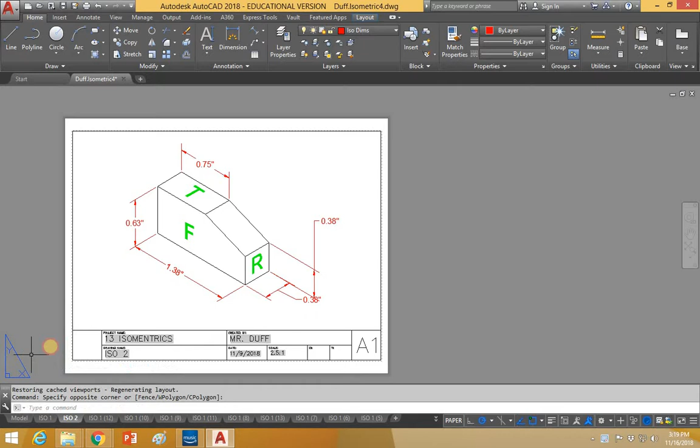In fact, as I'm sitting here, I'm just happening to be noticing this should be a little bit different, this whole situation. So quickly I'm going to go to model here, zip over to this, and this is another one of those ones where it's not updated in the video. I don't know why exactly. So we'll deal with this in a second.

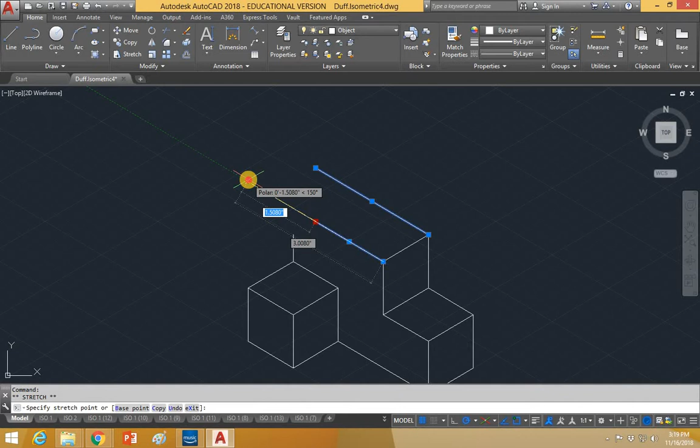So, talking about this drawing, this is our next drawing that has to get dimensions. So, let's go back and take these ellipses off of here that we put on here earlier. And then let's get some grip edit practice. So, if I take my grip edit and I pull this line out, and just to make sure that I stay with that green line in front of it, it'll draw it out to a length where I know that it'll stay straight. And then I'll draw this one out, and I'll cross over that line, just like if I was drawing with my pencil.

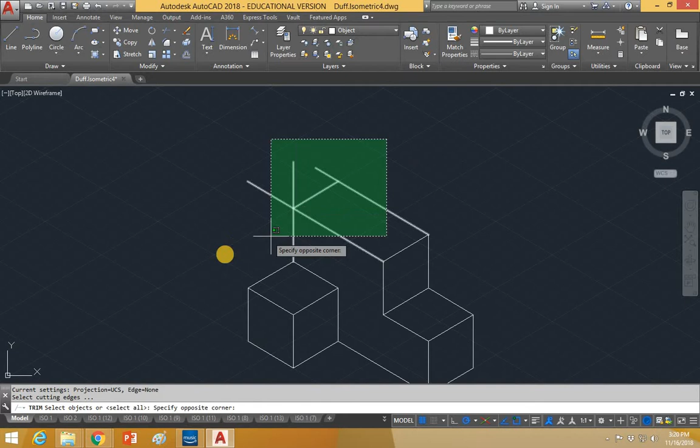Then grab line. I better change my layer. I want to get to object. Make sure I'm in object here. I am. So object, line, pull out here. Great. TR. And we'll drag all of this off of here. So we trim all that out. Okay, great. So we have our original object back. So let's go back to the dimensioning layer. Let's go to ISO dims. Let's come up here and go to aligned.

And the reason, maybe the main reason we're making this video, is when we have situations like this. So if I click on this side and I click down here, so the length of this object is, let's get a look at it, 1, 2, 3, 4, 5, 6, 7, 8, 9, 10, 11. Looks like 12 squares, right? So it should be 3 inches. And if I click on it this way, it pulls me off at 3.61, which is not what I want.

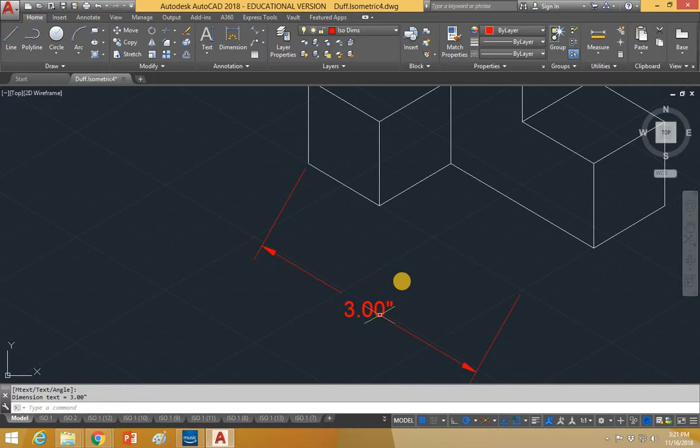The way I want to be able to pull my dimension off here is when I go to aligned, I'm going to click on this side, but because this line doesn't extend out, I need to pull it from here out in this area. Okay, so what I'm going to do is I'm going to hold my mouse here and I'm going to draw this green tracking line out to this intersection and then click and pull off, and then I'll do my dim edit now so we can see what we're looking at.

Click oblique. Click our object, enter. We got to put our angle in here. I think it's this way. Yep, we're good. So that's awesome. Now we have our 3 coming off the right way. The problem that we have, though, is that this extension line needs to extend down to here to be done properly. And we don't have that situation. And there's really no way to edit this, so we're going to come up with a cheat.

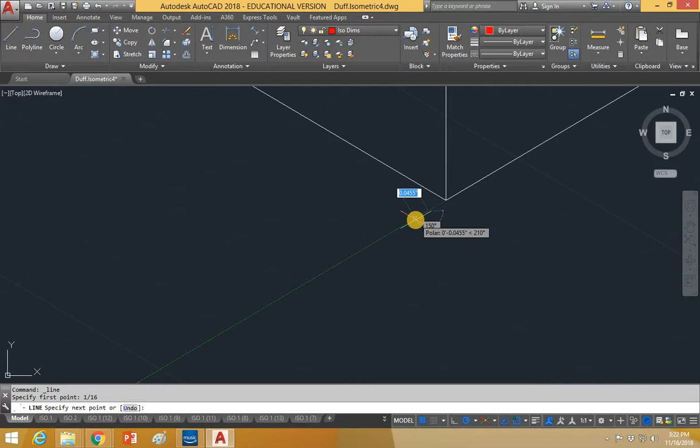So I'm going to come up with the line tool and make sure I'm still in ISO dims, and I'm going to come down here and I'm going to draw my mouse off because I want to start this point a certain distance away. Now most of our extension lines, I don't remember exactly how we set it up in our dim styles, but we're going to make 1/16 how far away we should start our extension line from the start of our line. So I'm going to come in here and I'm going to draw this, and now nobody's the wiser. It looks like we have our general dimension the way it's supposed to be.

So I'm going to go through and just dimension this whole thing together here to see if we run up with any other problems. One of the more difficult parts, and you're going to end up stealing a lot of the dimensions from me, but you should learn as you go. And the idea is you want to put as few dimensions on as humanly possible while still making the person who tries to build it able to build it.

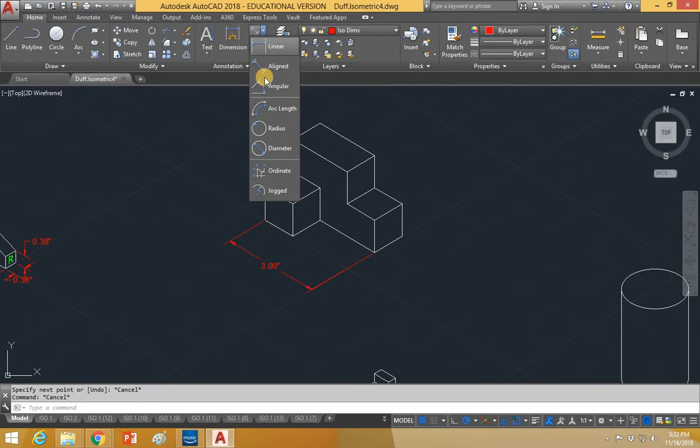So you really want to be careful not to over dimension, especially because the more dimensions you put on, the more complicated the drawing becomes. Visually, the person who's trying to make it is confused by the fact that you have so many dimensions on there. And some things can be inferred.

So like, for example, if we put this 1 on here, and let's put this someplace else. Let's go like this. Let's go aligned, and we'll pull a line. Let's go this way. Let's go up top. So we'll click here, and then we'll extend this line up to where it hits there. We get 2, and so we can see it right.

Dim edit, oblique, click my object. I believe we want to go down with this one. Yeah, I think that's pretty good. We'll align the text later. But now we have that same problem we had before. So let's grab the line tool. I'm going to come up. I'll zoom in closer so I can see what I'm doing.

1/16. Enter, connect our lines. Again, no one's the wiser and everything looks perfect. So then we want to go through, and at some point here we have to say that this is 1. And once we put this 1 on here, so let's do this.

Let's go here, here, to there, drag off a little bit, dim edit, oblique, click our object, enter. I'll go away from it again. Okay, pop that in. And now we don't need to dimension from here to here.

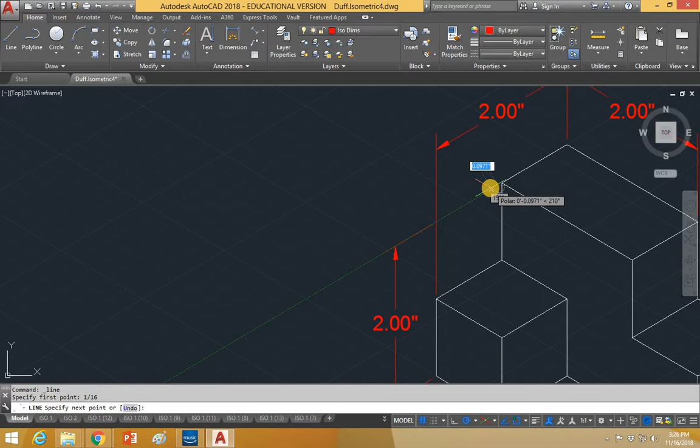And again, we're gonna have that situation where we need a line in here. So come off. Let's go 1/16. Connect to our arrow. No one's the wiser. We're in good shape there. So do we have everything we need on this object? We have this. We have this overall of 3. We know that's 1. We have this overall of 2. I don't think we have anything that shows that this or this also is 1.

So let's go through and put something in there. And, you know, sometimes you have to wrestle between what's the clearest way to do it and what's the... Because if I put this 1 down here, and I'll show you what I mean, it's going to make the object look clunky. It's easy to do, and we don't have to use the cheat that we've been using. But if we go dim edit, oblique, click here, enter, there to there.

Now, it's not the worst, but it might look better. It might be easier to read if I do it someplace else. I just hit undo there just to get rid of that. So let's go aligned again and see how this looks. And literally, guys, this is dimensioning. Sometimes you have to kind of play with things to get the right situation.

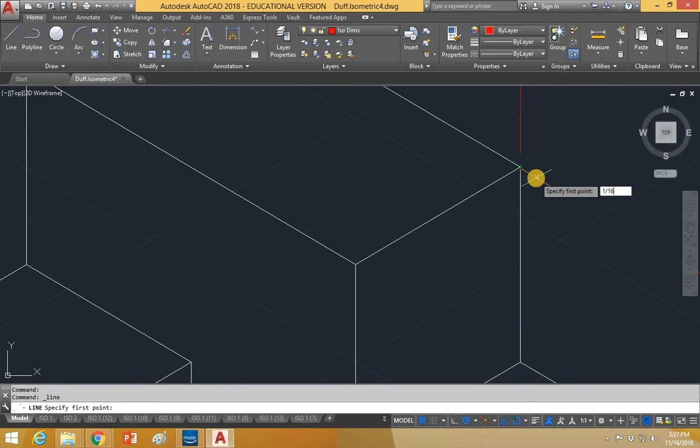So dim edit, click oblique, click here, hit enter, draw our angle back this way, add our line. Oops, almost forgot our 1/16. Enter. We'll see how this looks. Maybe we like this better. The goal is to make it as readable as possible for the user, and I like that one. Now, it could have been down here. It wouldn't have been the worst situation, but we don't have to have that situation, so let's not do it.

Another place we don't know for sure is we don't know that this is 1. There's no way we can guarantee this. So what I would suggest doing is rather than try to cram that 1 in there where we know we're going to get a leader, let's do this. Let's back up this 3. And let's move this 2 back to here. And then let's put this dimension in. Let's go aligned.

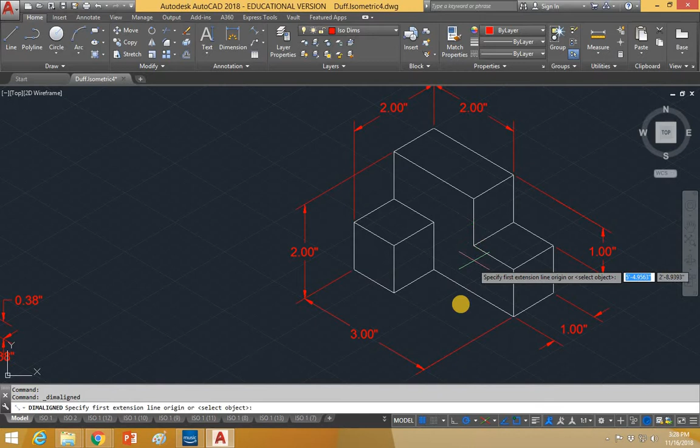And we'll go... The other thing you don't want to do, this is also wrong. You don't want to be here to here because that extension line is going to finish through the object, and you wouldn't want that. So make sure you don't do it that way. We should do it with our cheat that we've kind of been doing here to make it look correct. So draw here, and then we can pull our line out again.

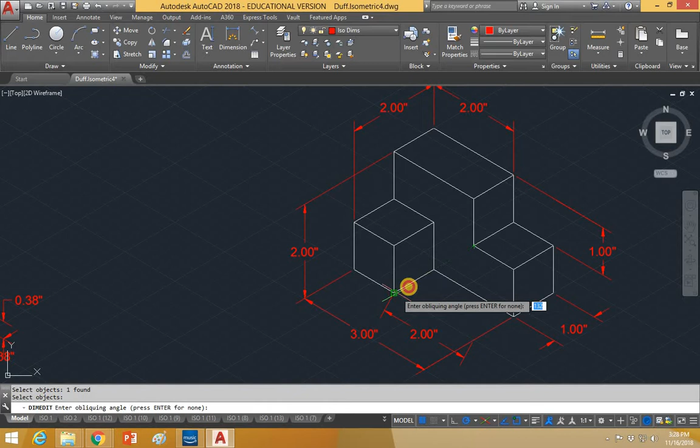Put that 2 there, dim edit, oblique, click our object, enter, here to there, and I like the way that looks. Right? So now I come up and I know this is an overall of 3, this is an overall of 2, so we know this has to be 1. Same thing here. Overall of 2 has to be 1. I think that's all the lines we're going to need here.

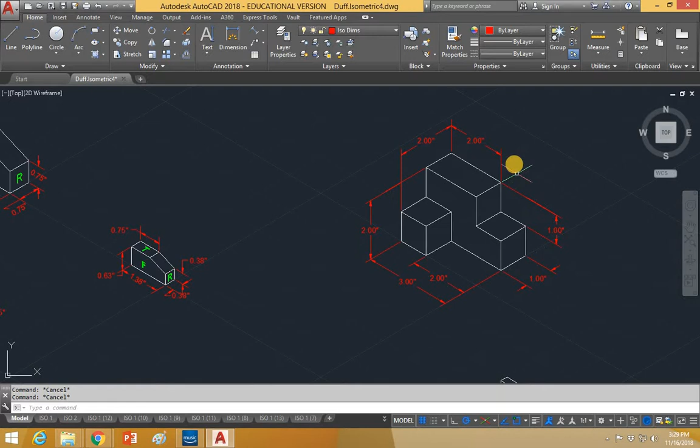We might tweak it up a little bit as we bring it into paper space, but in general, we're pretty good. We also want to make a real effort. So if you look at the way my dimensions are, we want to try to keep them off of the object, right? We don't want a situation like this. This would be wrong. We don't want here to here, right? And then dim edit, here, enter. This is like an absolute emergency if you have to do something. There's really no other way.

We want to keep our dimensions off the object. We want to also keep them as clear as possible. You can see I've got good spacing. It's not hard to tell which line is going to what space, what dimension is for what arrows. We're in good shape. Most of what we did down here, this is like, I don't know, drawing number 9, I think. But most of what we did down here had similar issues. We had to come up with our cheat here.

You can actually see we're missing our cheat here. I didn't realize it when we did it, but now I can take my line, come down here, draw it off, 1/16, draw that up to here, and now that's fixed, right? So we had a couple of things here. There was also some inferences here, right? You know, I put this 0.25 in here. I could have done, what's the overall? I could have done 0.75 from here to here like I did on the last object. But I didn't like the cheat. I didn't like the way it was going to look with having to pull that one line off of there.

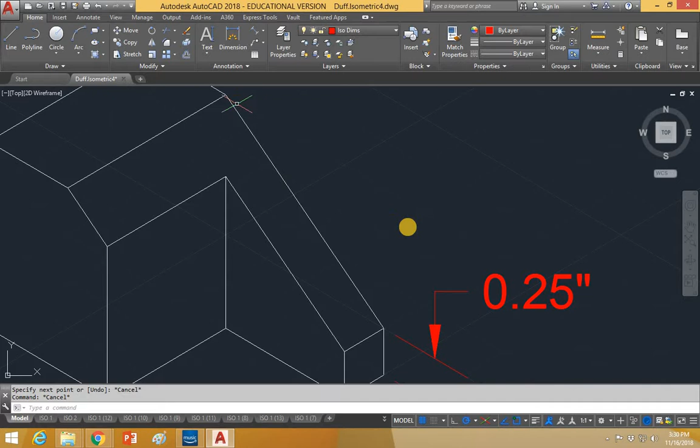When you print your drawings, 9 times out of 10, it's not going to be different colors. It's going to be all black and white. And sometimes when you have to have additional extension lines, it doesn't look great. I mean, I could do it. I don't know. Let's change it just to make it look a little bit better. Oh, wait, that wasn't for that anyway. Sorry. That's a quarter. Oh, yeah. Sorry, it was. And we dimension. We didn't need to see that.

It does get a little confusing here. It looks like that 0.25 sometimes isn't here, but it doesn't need to be. We know this is an overall of 1. We know this is 0.75. We know the leftover is 0.25. But this can be a little bit confusing. So let's get this one out of here. I like that idea. Let's go aligned. And let's go here. And we'll come in here and we'll draw our line out until we figure out where we need to be. Right there.

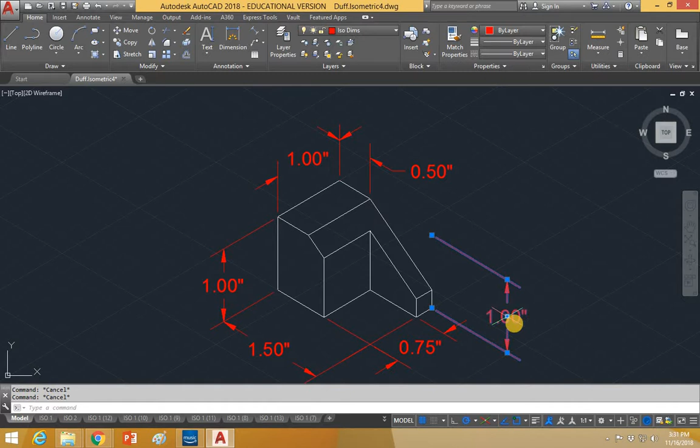We'll pull it off. Dim edit. Oblique. Click our object. Enter, and we'll go back the same way as our extension line should be. And that's in the wrong spot. We actually did that a little bit wrong. Apologize for that. Aligned one more time here to there. And then we'll click that in place, dim edit. We'll go oblique. We'll hit enter.

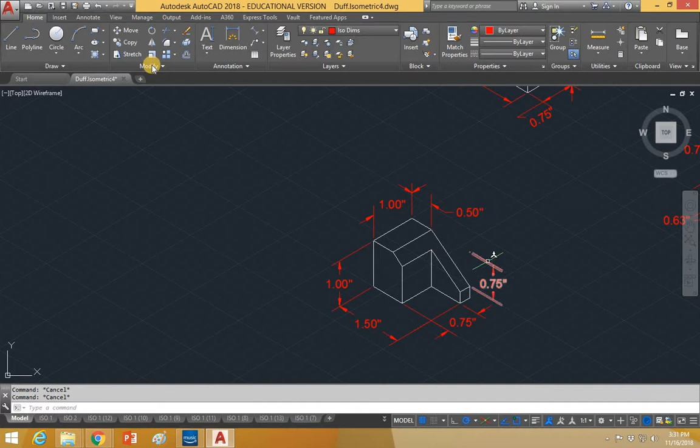Click again. Now we've got to go and have my object going this way. So then I will take this. I'm going to drag this in here. I think that'll look a little bit better. Draw this line out here so it's, you can't make it exactly now, but generally where that is. Right, and maybe that looks a little better. We'll draw our cheat line in here. Pull this off. We can get it at the angle we want. 1/16. Connect it to my arrow. Again, nobody's the wiser. And it looks good.

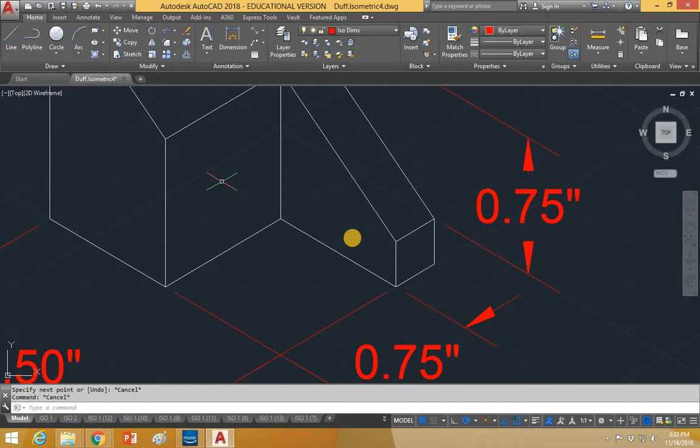So just some other objects. We still have to go through and put our front, our top, and our right side. That right side is going to have to fit on this face or this one. Same thing for that other one. But those are the things I wanted to teach you or show you. Then you have to go and bring it into paper space and figure out what scale you want. But those 2 little helpful things, dealing with this cheat and how to handle that situation, should help.